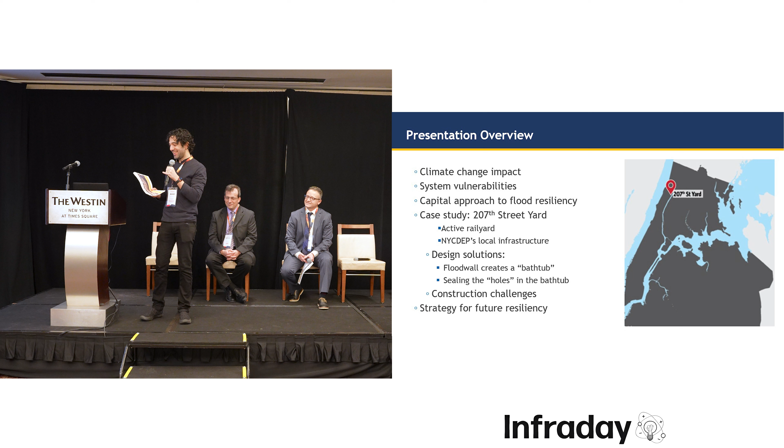I've always told my story with Hurricane Sandy. I had moved from New Hampshire to New York within a week. I had to surf out of my apartment in Shore Parkway. Last year, my wife was pregnant, and she asked me, what do you want to call our daughter? And the first thought was Sandy, because I've been working on hurricane and climate adaptation for 10 years now. I could tell you her eyes were so mad. I thought that I'm going to have more impact than Sandy on my house. So I didn't tell her what was the second choice. The second choice was a flood. But we moved on and we called the daughter Jenna, who's 5 months old right now.

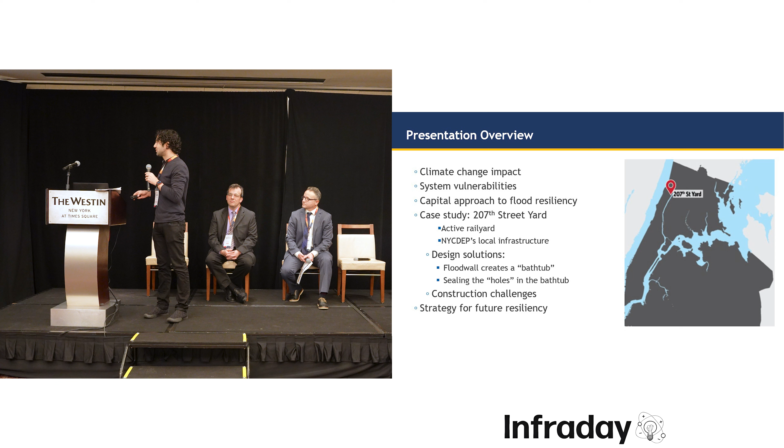Again, we'll talk about floods. And in our case, it will be 207 Street Yard. I'm sorry, I went backwards. And when I talk about floods, everybody knows everything about floods. We recently had Hurricane Helene that brought destruction to Florida as well as Georgia and North Carolina. Before that, Milton. And locally here, we had Hurricane Ida, where we had a lot of rainwater going into the subway system. Again, the subway system has the lowest point in almost every neighborhood and zip code in New York City. So we are affected by floods and rainwater, intense rain events.

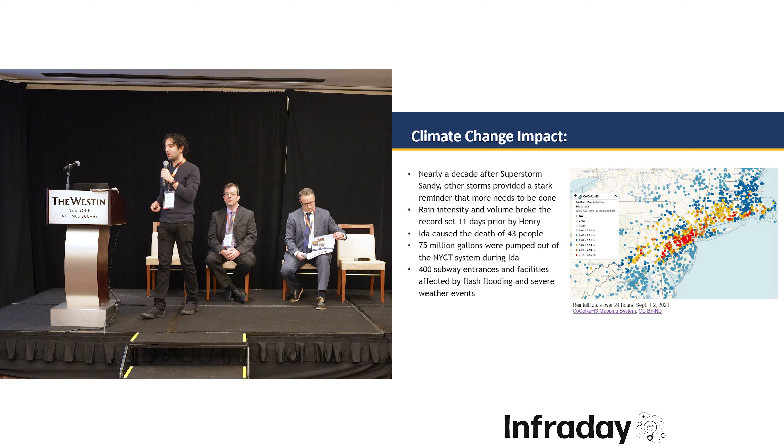Severely, and that impacts the economy, the well-being of people, and our ability to connect people from point A to B. Again, we have impact on our infrastructure, and it is not just the stations that you see and the trains that move you and connect you, but also the yards. I'll talk a little bit about our assets, and I will talk about how we focus on our response, which is what I do, a capital approach to preventing floods or making the subway more resilient. So we plan, design, and construct resilient measures and structures.

10 years ago, when I joined the MTA, I worked with folks that are in the room, such as Dan Weiss, Anthony, who's behind me, and Alto. We started as researchers figuring out what we could do for this unique environment, 120 years old. At the time, it was 110 years old. A 120-year-old system built by 3 different operators to different standards with different structures, and with a lot of requirements, how we can navigate the system and build some resiliency in the system.

We worked, as I said, on the planning, designing, and construction, and on the process improvement and how we deploy for a flood event. We have 277 underground stations. Those are the most prone to flooding. We have the underriver tubes or the tunnels, and those tunnels have fan plants that sit on each end of the tunnel, which is a giant access hatch or an access point for water to get in. We also have 39 yards, terminal shops, and 850 miles of tracks, and we'll be talking about one of the largest yards. It's the second largest for the MTA. That's the 207 Street Yard.

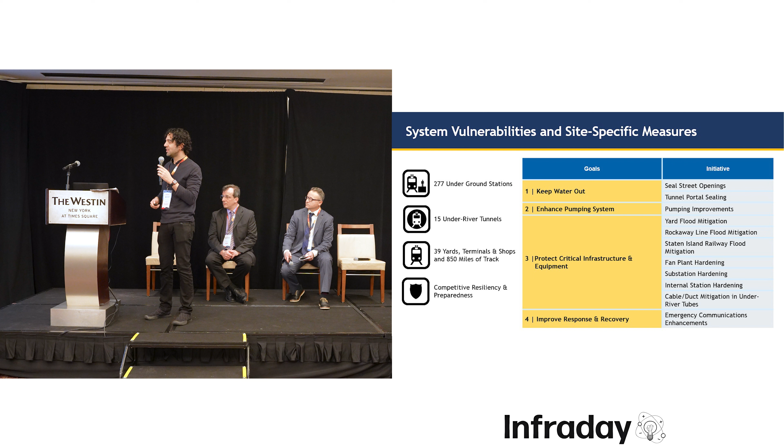Since Hurricane Sandy, we came up with different action plans and ways to combat the rainwater, that's flash flooding, as well as coastal flooding. And when we first started, we did what we call the near-term improvement. That is solutions that are off the shelf. Again, as I mentioned, hurricanes and storms have existed forever. They are increasing in impact and intensity, of course, with more urbanization and with more folks going towards the water bodies, living on water bodies. So we see more and more impact from floods.

So when we started thinking about that, what did the Mesopotamians do? Because they flooded as well, and they did what we call flood logs, right? A very simple technology. They just stacked logs to protect. So we started with the near-term improvement. That's right after Hurricane Sandy. Then we started developing what we call the long-term improvements. Those are what you see, the marine doors that were introduced to the subway, flood walls, as well as mechanical closure devices and different types of devices to protect from floods.

We also looked at, just like when you look at risk, avoidance is the first one. We were trying to protect from water getting in, but also we were trying to share some of those liabilities. So we got insurance. We asked our contractors to get insurance when they work, right? And we tried to stay with a project that produced a passive solution for floods, so we don't have to deploy. We don't have to go to the subway system and expend labor power to deploy.

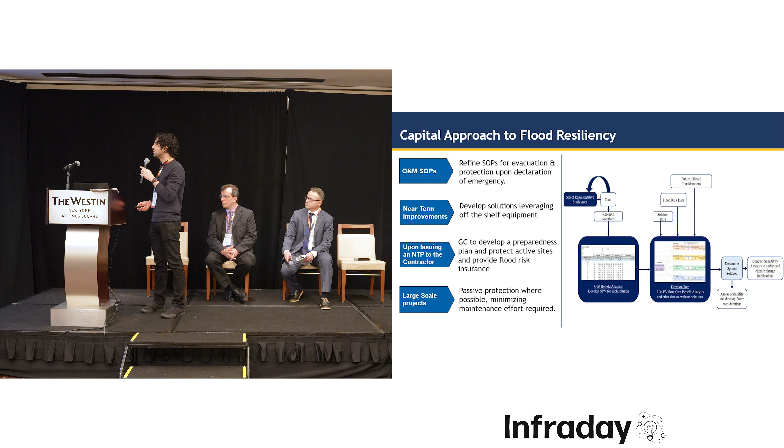Here you can see the graphic is a sensitivity analysis where we do look at the area, we look at the research that we do, the hydrological research that we do, and then the different solutions that we have, and we select the best solution for us. I'll turn it over to Anthony Falcone to talk a little bit about the design.

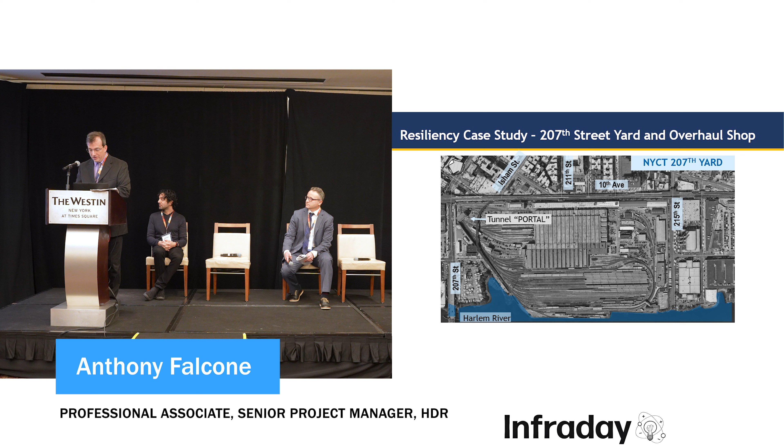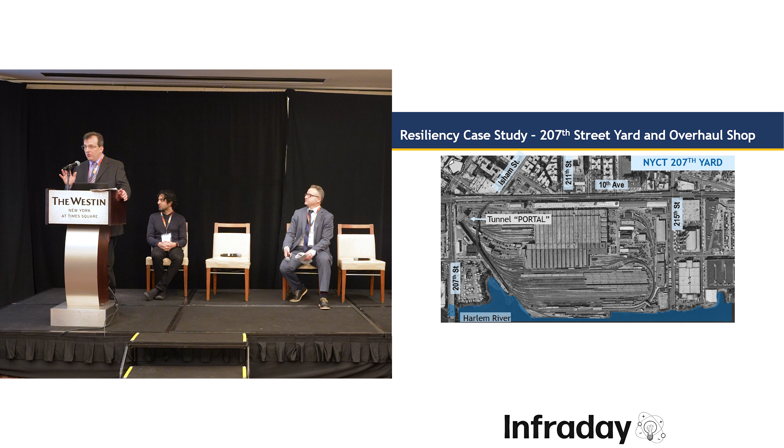All right, some orientation first for 207th Street Yard. This is at the north end of Manhattan. North is to the right. The north end is 215th Street. The south end is 207th Street. We're bound on the west by 10th Avenue and on the east by the Harlem River. The yard is approximately 40 acres in size. That one big building in the middle by itself is 8 acres just by one building alone. The yard was built in 1927.

The flooding from Hurricane Sandy did not overtop the seawall in a dramatic fashion in 2012. It actually was much more insidious. It backed up into this sewer system. It backed up through the system to the yard drains that are right by the yard portal at the very south end of the yard, and it flooded that portal and the tunnel thereafter. So New York City Transit came to us and said, design something such that this does not happen again.

And the first thing that we did was design a flood wall around the yard. Second, we also designed a flood gate by the portal. Third thing we did is put in a seepage cutoff wall to deal with any infiltration under that flood wall. And the fourth thing we did is we said, okay, every one of those sewers and regulators and tide gates, we were going to seal them off because we created this bathtub. We want to prevent the water from welling up inside of it.

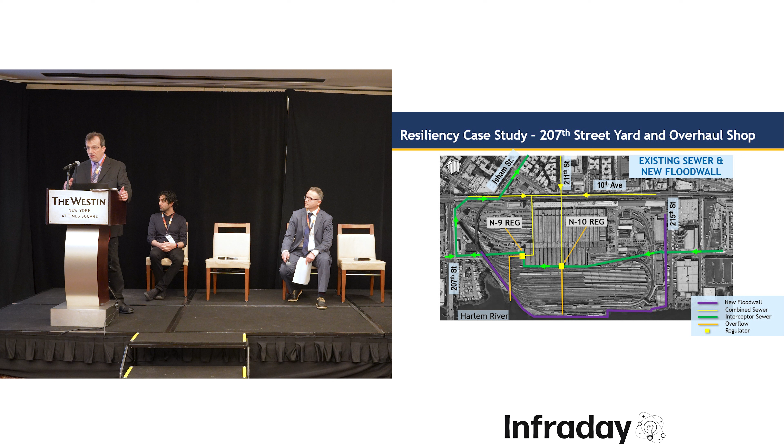But before we could even start this design, we had to do our due diligence to make sure that the changes that we're making to the sewer system are not going to adversely affect the rest of the neighborhood. We ran a hydrologic and hydraulic analysis using DEP's own InfoWorks model for the area. We refined it just for the yard. We did flow metering to calibrate our model, make sure that it's reflecting reality, and then we overlaid our new sewer layout to it. And our analysis showed that the hydraulic grade line, the difference in height of the water in the sewer, is less than 1 inch post versus previous to the construction. That means, in actuality, that's less than the accuracy and the precision of the model. So we're in the right zone in terms of not affecting the adjacent neighborhoods.

Next thing we did for the design is look at the profile. And that green line at the bottom shows that the sewer does go downhill. That's not a problem. It can work by gravity. What's not so great is that the topography is not very helpful here. We start off anywhere from 19 feet deep all the way up to 35 feet deep to install this sewer.

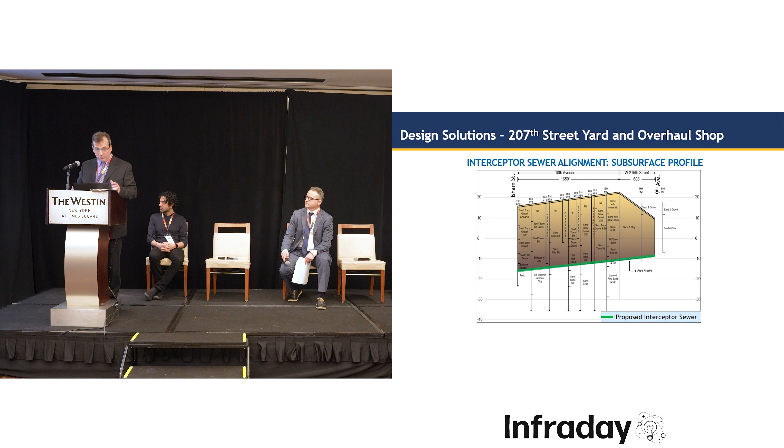And the solution we came up with is microtunneling that sewer. That solves two problems. Number one, it solves the issue of being able to get so deep to install this sewer. And number two, on 10th Avenue, you have an elevated subway over your head. So you're not going to be doing a 35-foot deep open trench excavation next to an elevated subway. It's never going to work.

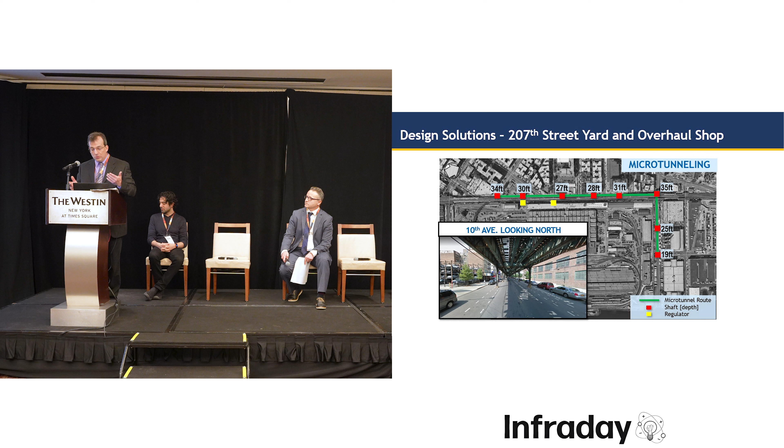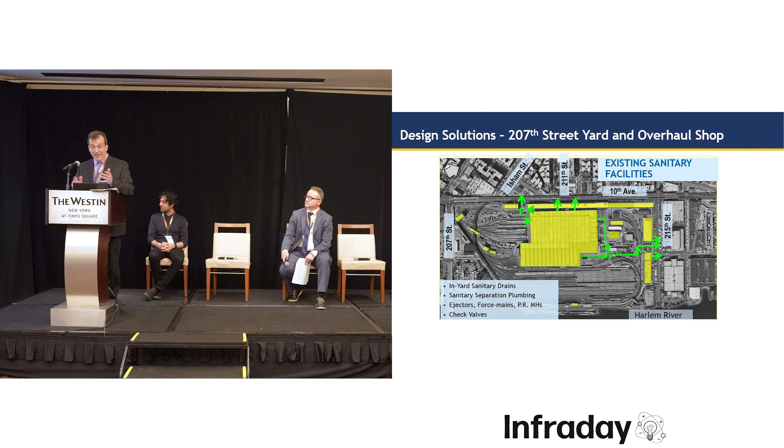Once the sewer is outside of the yard and those regulators are outside of the yard, the next step that we have to deal with is the sanitary drainage inside the yard. That means every single floor drain, slop sink, bathroom, shower, every one of those things have got to be traced down, tracked, and either we can prove that it goes out to the streets by gravity, or we had to send it to 2 intermediate pump stations and then pump it out of the system, out of the yard, into the combined sewers outside.

And once that's done, what you're left with is those last 2 or 3 sewers inside of the yard, which are now downstream of the regulators. They're combined sewer overflow pipes. However, during the storm surge event, when you have water outside of that flood wall 14, 16 feet high, that pressure is pushing back inside this system. And these are brick sewers. Brick works great in compression, but is horrible in tension.

Number one. Number two, if it's raining cats and dogs and you have a flood condition outside, all of that soil on the inside of the yard is all saturated. So the shear stress of that soil has been reduced, because now you don't have all that weight of the soil, but you also have to subtract the buoyant force of that soil.

So our solution there was to do cured in place liners for all of these sewers. Number one. Number two, every manhole that remains, we reinforced it on the inside with gunite. Third thing we did is every manhole that was not necessary, that was beyond the minimum required for that size of sewer, we abandoned it.

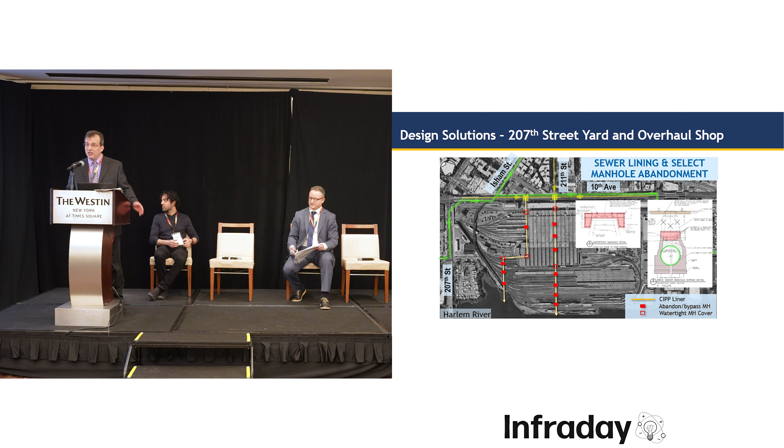And then the fourth thing we did is for the manholes that did remain, we installed bolted down manhole covers, and we also installed a cast-in-place concrete lid on top of it to act as a counterweight in case there's ever an uplift force over there. This pretty much defines the design intent. I'll turn it over to Alto Dogan now to talk about the actual construction and the construction challenges.

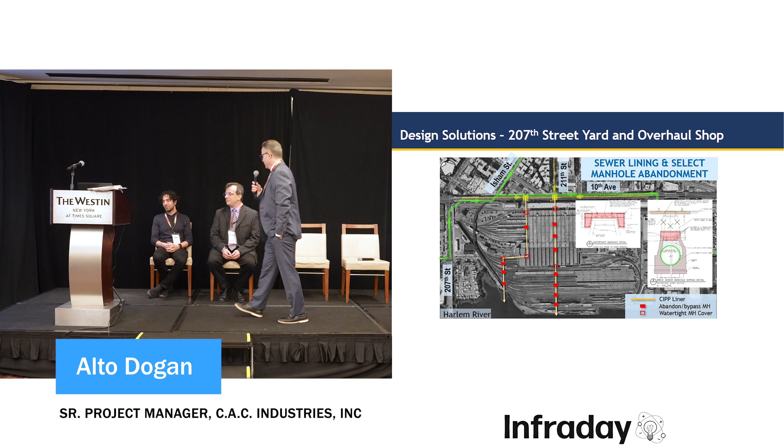Good afternoon, everybody. Thank you, Eamon and Tony. After Eamon and Tony did their due diligence, now we came into picture, C.A.C. Industries, to build. The challenges, do you have the...

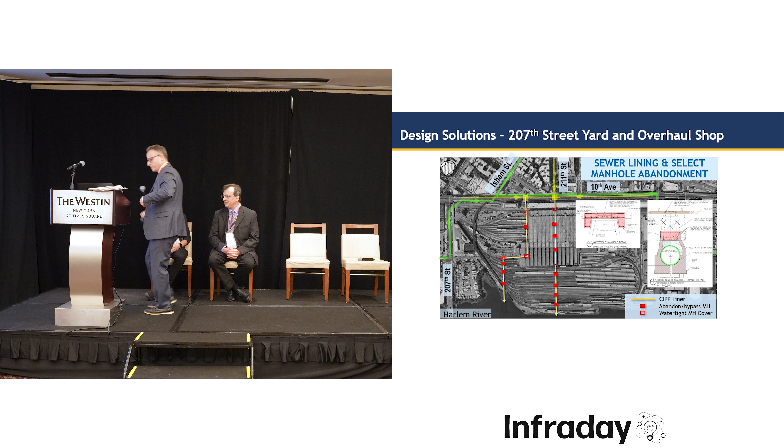Challenges, Eamon mentioned that before. It's an old infrastructure, about 100 years old. And the limited space, both above and below ground, especially out on the street. You have the elevated structure, like Tony mentioned before, and you have all the adjacent buildings right next to the structure. Navigating around the yard and shops. This is the second largest yard in the New York City subway system. So it's a busy yard. We had to navigate around them, as well as other contractors working inside the yard.

Field conditions keep changing, unforeseen, specifically inside the yard. The system was built, again, 100 years ago, and then tracks were laid over it. So even though we have technology to locate them, sometimes there were a lot of unforeseen conditions. And the pandemic. This job was awarded in 2019. And we had to start our construction right in the middle of the pandemic. Construction never stopped. We were the essential workers, and we had to work.

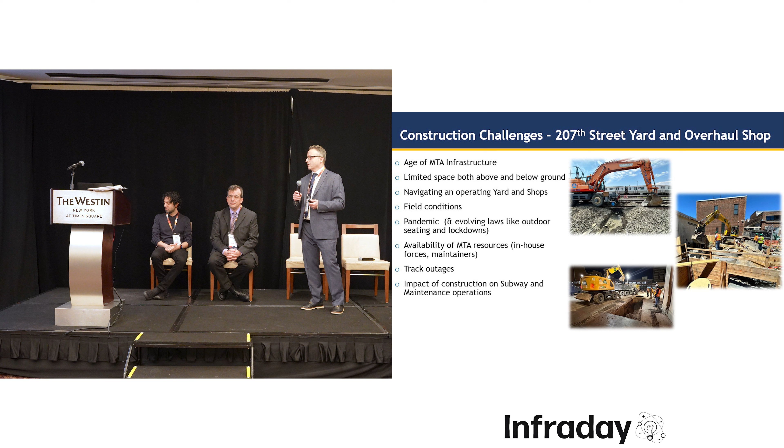So slightly after the pandemic, all those outdoor seatings started popping up. Every restaurant has outdoor seating, and they were right on top of where we're supposed to work and locate the utilities. Availability of MTA resources was already short, and the pandemic also did not help. Inside the yard, we have to work with the track outages. We have to take the track out of service, remove the track, do our work, and put the track back. And also our impact on the subway and maintenance operations.

I'd like to elaborate more on a couple of things. I can separate this into 2 areas. We did street work, and upon completing our street work, we had to go inside the yard and start abandoning or taking existing utilities or sewer out of service. So I mentioned the outdoor restaurant seating created during the pandemic. We had to resequence our work throughout them. We work with the community board closely, Eamon and Tony, and we try to impact them as little as possible.

Also, unforeseen utility interferences. I mean, working out on the street in New York City, you have Con Ed Gas, Con Ed Electric, ECS, Verizon, Level 3 cables, you name it. So our job was to relocate them, but we also found a lot of them that are not shown or not known.

Also, like Tony mentioned before, we have elevated structure overhead. And as you can see on the photo, we have to do this 30, 40 feet excavation right adjacent to that track, and the train is running over it, you can see. And then on the right side, there are adjacent buildings. In this case, it's a parking lot with multiple stories.

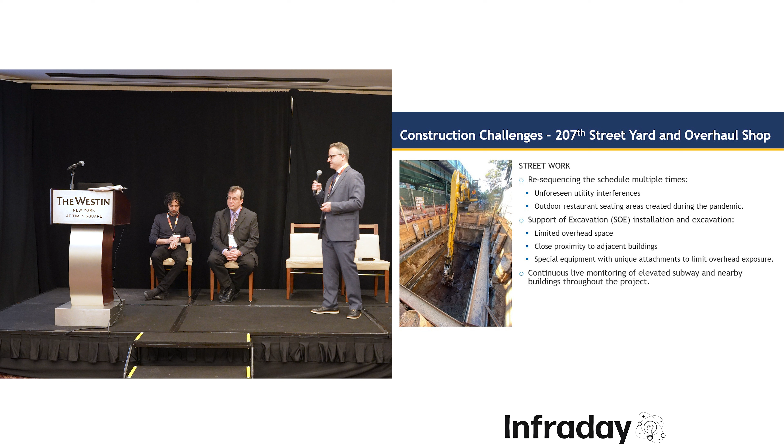The second area is working inside the yard and the shop. Because of the operations, we have to work off hours and on the weekends to minimize our disturbance to yard operations. Again, similar to outside, we had to resequence our work because there was limited underground space, and we had to move several times between different locations to fit our large equipment like pump stations, oil water separators, etc.

And also navigating yard operations and other contractors. There were at one point, I think, more than 5 contractors working in this yard. I mean, the success of this job, I think, is working collaboratively to resolve the issues as they arose, because we were working on track outages, and you have to resolve and find a solution right away within limited days. So we got on the call, we got on the table, we got in the same room, just to find the best solution to get the job moving.

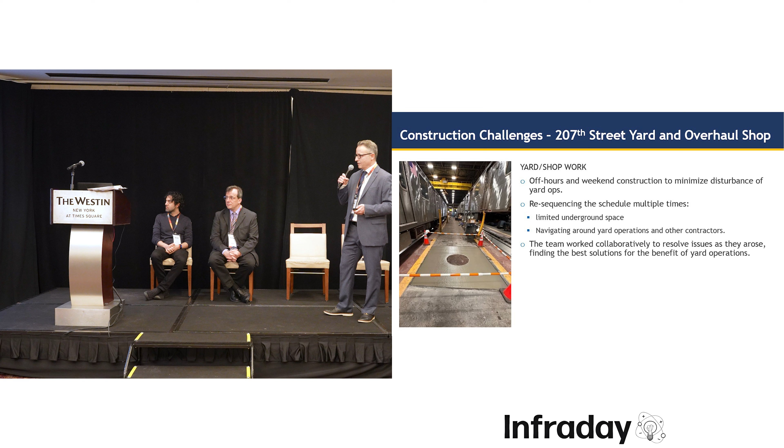I mentioned several stakeholders already, like Con Ed, Level 3, Verizon, ECS. As you can see on the photo on 215th Street, we had sanitation, and they double, triple park their equipment. They're needed, especially in wintertime for snow plowing; they lay their trucks out there, so we have to coordinate that work closely with them. Those stacks had to be removed, so construction was going on there, and we were working with them closely.

State and city agencies: this is an MTA job, but basically we're doing sanitary sewer, so eventually it's being turned over to New York City DEP. So there was close coordination with DEP, New York City Transit, New York City DOT, and for emergency responses with FDNY and NYPD. I mentioned the community board before, so we worked with them closely for outdoor seating or access to buildings where we needed to excavate or install our SOE system.

And with that, I guess I'm turning it over to Eamon to close it up.

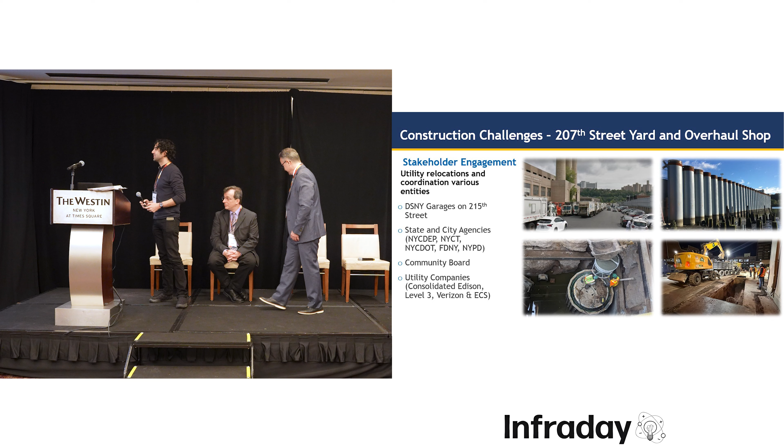Well, this project defies the norm for large construction projects, in that it was finished on time, actually ahead of time, and about 6% below budget. The reason for the success was the one-team approach. You can see the graphic that I made here. A typical approach is a hierarchical approach, and in this approach we all worked with the same capacity. All of us worked for the project.

We were aided by the idea of co-locating. We had the same office where we can walk and talk and coordinate with each other. We basically saw each other every morning. It was right next to the yard, and all of us worked together. The folks behind me and myself were all engaged from day one, so there was no change in the leadership of the project, and that carried to the other team members. So almost everybody on the job was there from day one.

That's from 2019. We also tried to experiment with the use of new technologies. We used drones, LiDAR, ground-penetrating radar. We used sensors for curing of concrete, and we used AI tools to script all our meetings. And the pandemic benefited us, where we were able to meet all of the other stakeholders online rather than losing time traveling. Sustainability was at the heart of the project.

My father taught me something related to medicine. He's a physician. He was very disappointed that I became an engineer, but he wanted me to make sure that if you build a hospital that treats cancer, you don't include material that could cause cancer. Same with sustainability. When we looked at the material, we tried to use responsible material and equipment as much as possible.

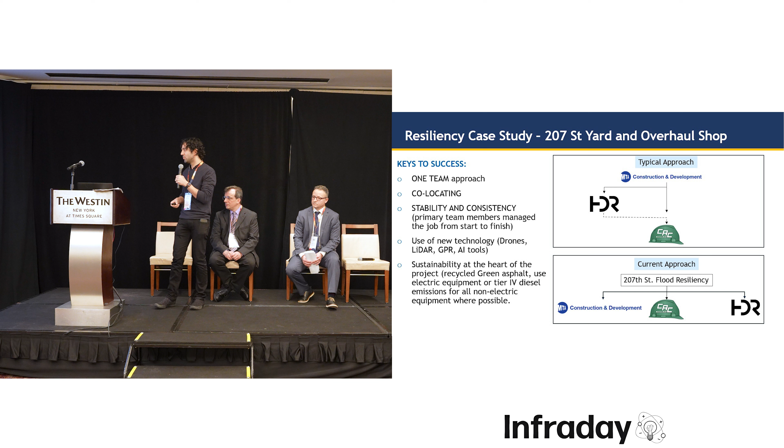If you saw the pictures, we worked on the streets, so we had to redo most of the streets and the curbs. So we used recycled green asphalt. We also used electric equipment wherever we could, and when there was none available, we used Tier 4 diesel emission equipment to continue work with the sustainable approach for this project.

And finally, I wanted to talk about the strategy for future resilience. I will sum this up in as few words as possible. Floods and hurricanes are here to stay. They've been here since the formation of this earth. The water will always rise. 6 inches of water could carry a person. 1 foot could carry a car; it could do a lot of damage. But with engineering ingenuity, with the will from folks, we can design and build structures that could rise above the water.